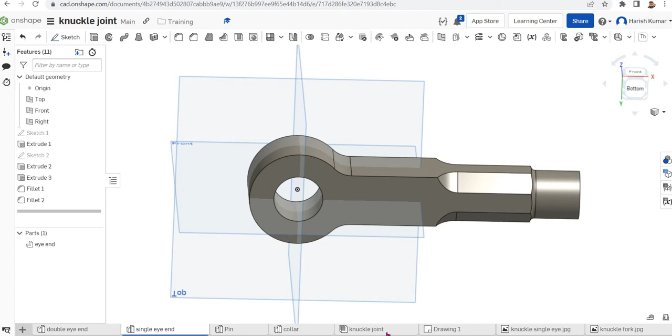Today we are going to do assembly of a simple thing which is a knuckle joint. It has only four components, and the assembled view will be like this. You can see this is a knuckle joint, already assembled here.

It has only four components: a fork end, a single eye end, then a pin. We will first start with the double end fork, then we'll do the single eye, and then the pin, which is quite easy. Pin and collar are quite easy.

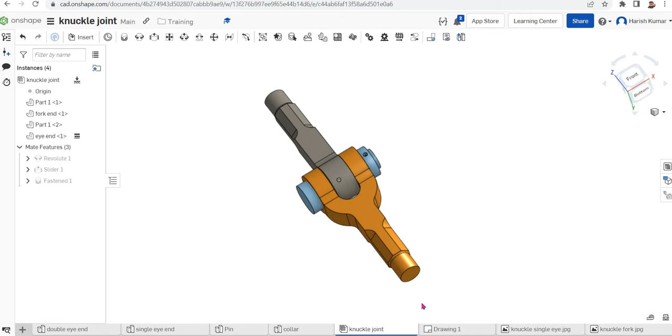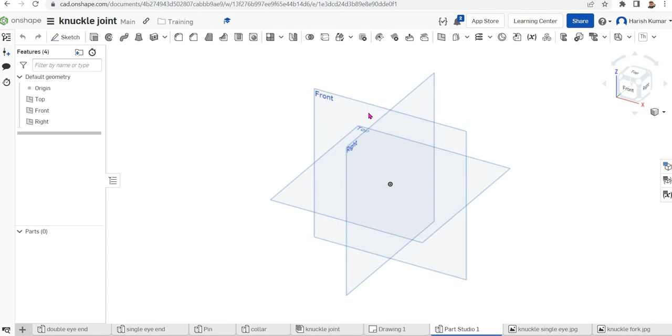Okay, so we'll start by clicking here. We'll start with a new part studio. I select front plane as the sketch plane, view normal. I will bring the single eye first.

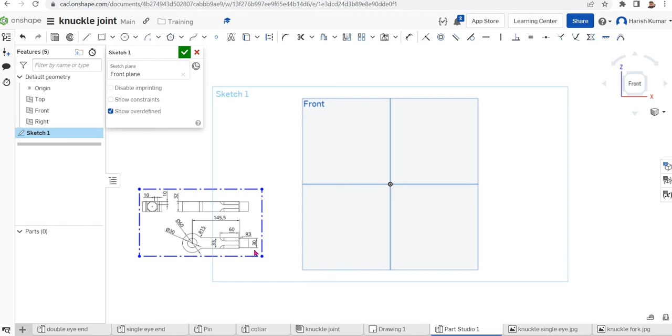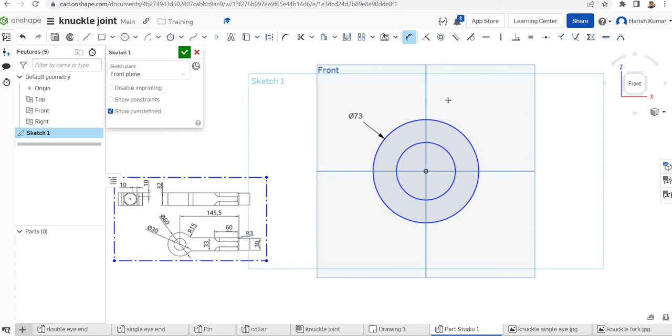So the dimensions we can see here. We will start with the sketching with the circle. Make dimensioning, that is 60. And this is 30.

So from this two-dimensional drawing we can see 60-30, and we'll just make a rectangle here, and the width of the rectangle is 33.

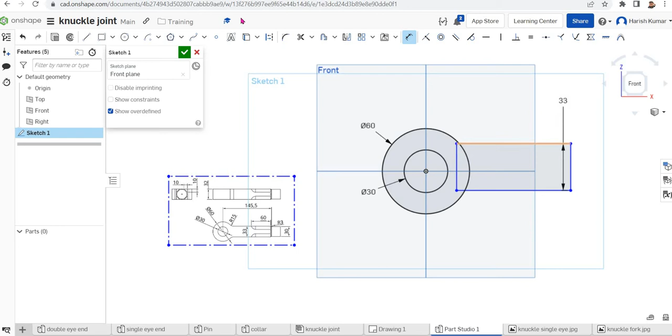I'll go for the symmetry constraint. Click the symmetry constraint, click this line, this axis line, this. It's symmetrically arranged. We have the length here as 145.5. So we'll make the dimension again. Click here, and make it 145.5. Right, okay, so our sketch is finished.

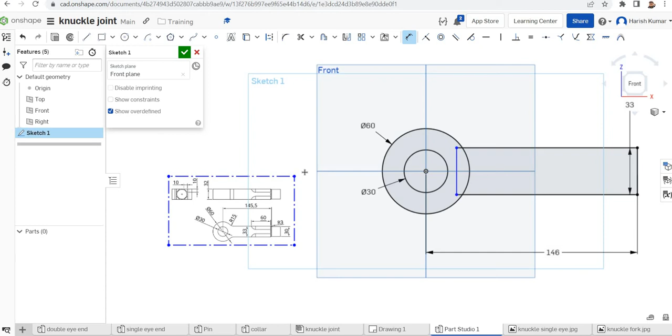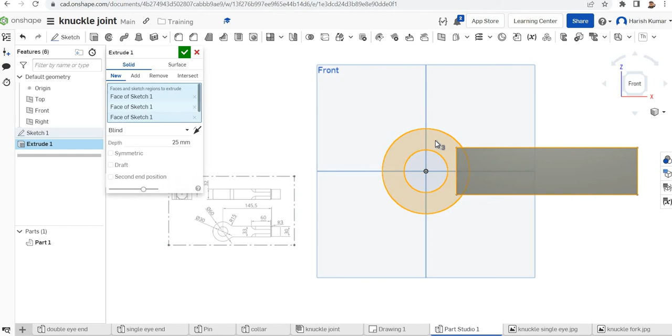We can directly go to the extrude. We can select this face, this face, this face. I just take symmetry, and the width is 32 here, 32. So the first portion is completed for the single eye.

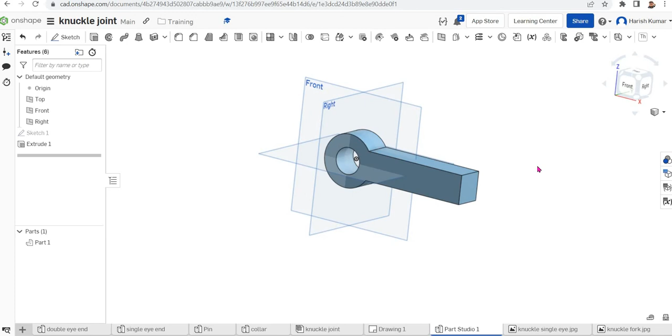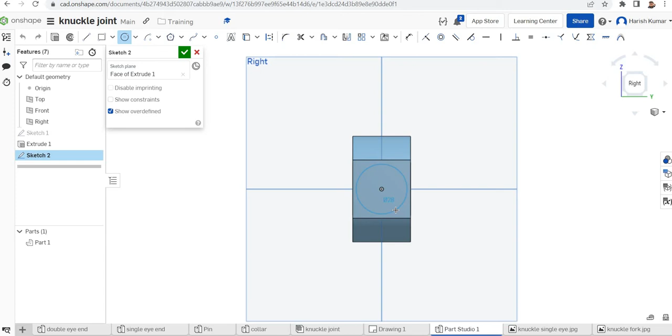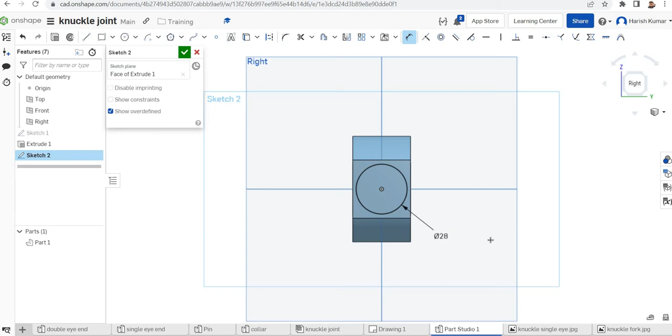Then we select this plane as a sketching plane, make it view normal. We'll draw a circle, and that is from the drawing it is 30. It is 30, and we'll make a line here.

Just make the dimension, point this corner as 10, point this corner again as 10. I'll make two construction lines for mirroring.

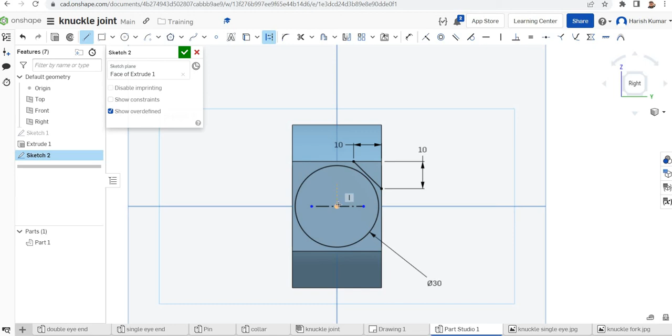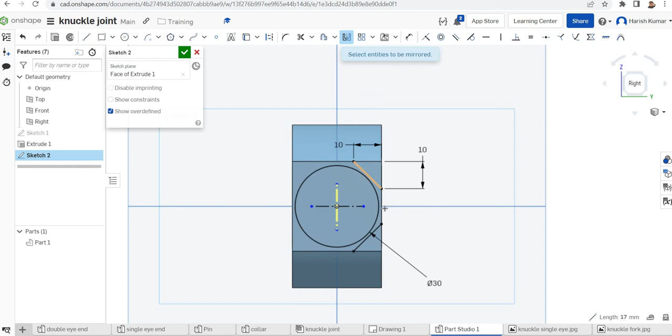Then I'll mirror this first, then again mirror about this axis, this one, this one. I'll go for an extrusion again, a cut extrusion.

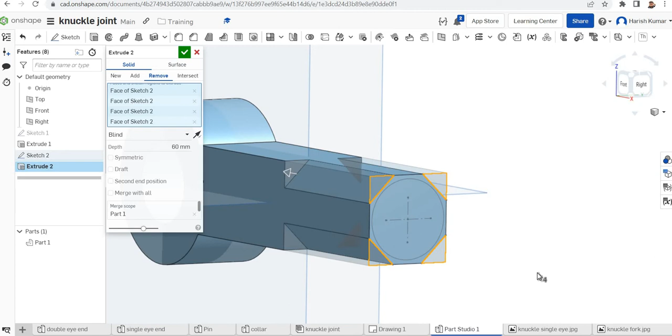This, and I make it remove, and dimension as per our drawing is 60. Finished.

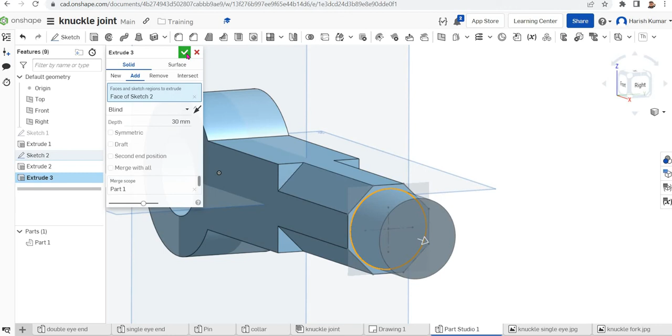Again I go for another extrusion of this circle only, and that is 30, towards the front side. Okay, just make this sketch invisible. Alright, so the basic shape we already get.

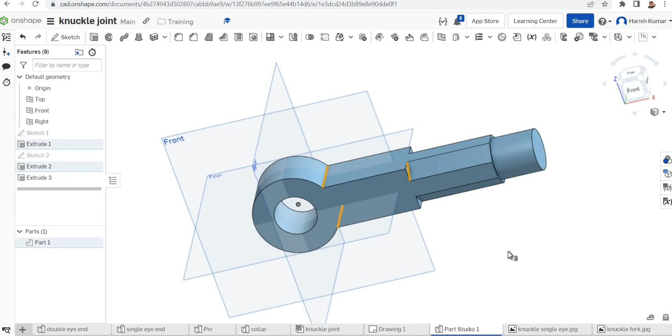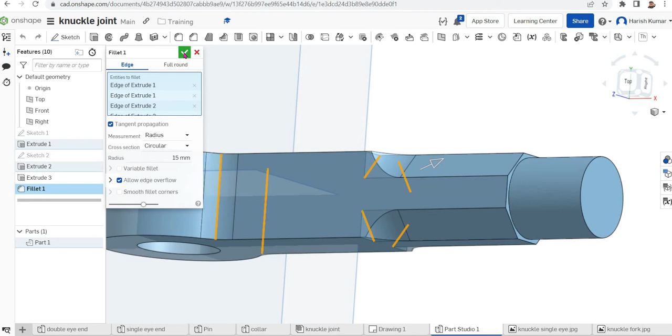Now we will go for the filleting. The filleting radius is actually 15. So I select this edge, this edge, this edge, this edge, this edge, and finally this edge. I'll go for the fillet and I'll make it 15. Okay, finished, so now we have finished.

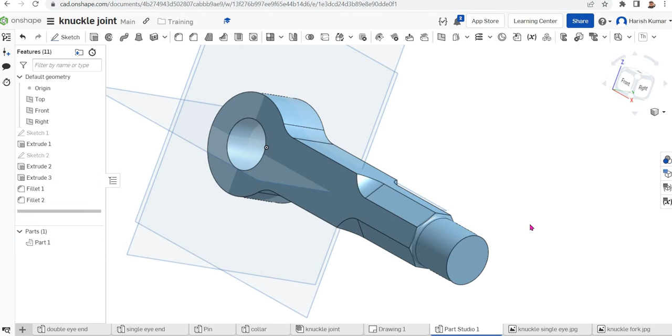One more fillet, we have to give this surface a fillet of 3mm. That's it. So we have finished the single eye end of the knuckle joint.

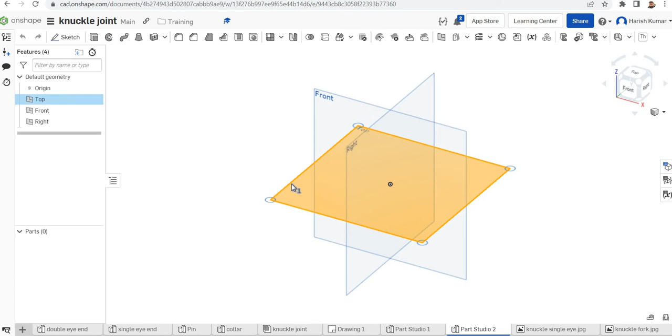Now we start with the double eye. For that, again we'll start a new Part Studio. We'll start with sketching in the top plane, view normal. I'll bring the picture first. Okay, so we'll start with a rectangle here.

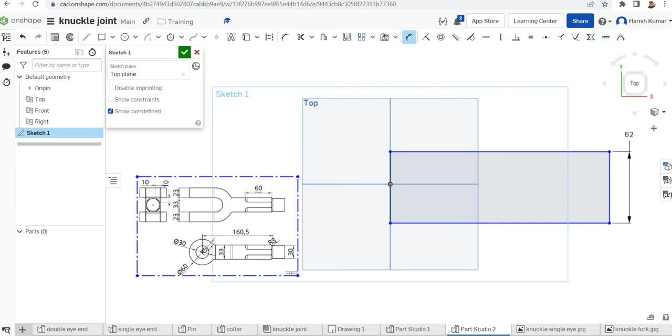The total length is 23 plus 33 plus 23, that is 79. Then I'll make it symmetry about this. That's the first thing done.

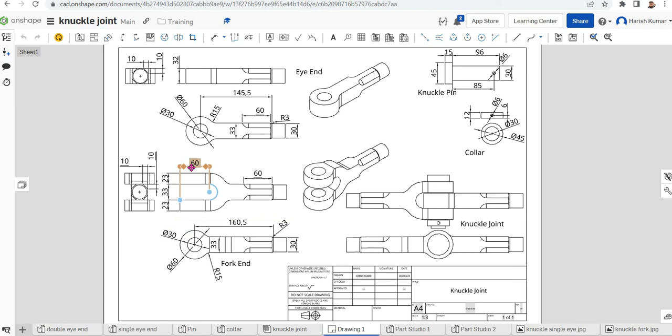Next is we will draw this rectangle. Okay, so what is the length of that rectangle? We will see, we will go to the sketch and you can see it is 60, so that's length is 60. It is not shown here, that's why I go there.

Okay, so we'll again start with the rectangle, and I'll make the dimension this as what, that is 33. I'll make symmetry for this rectangle about this axis, not symmetric, and I'll make the dimension for this as 60.

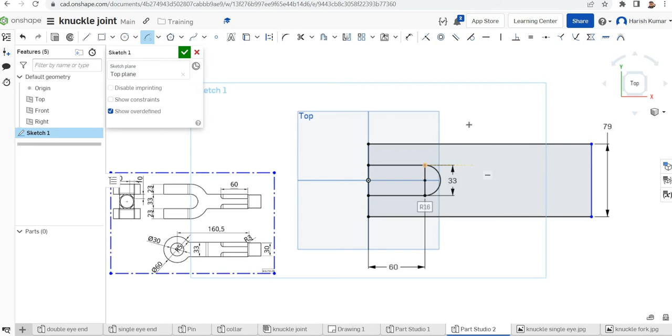Alright, now I move to arc with the center point arc. I'll just select this as the center, this as one point, and this as the other point. Again an arc, this as the center, this as the, this will be the next point. Okay, so you can see it's fully constrained. Alright, now again I go for a rectangle.

Which I draw somewhere here, and the width is again 33 as per the drawing. I'll make it symmetric about the axis. This and this are symmetric, and I'll make these points coincident with this. And we have this dimension 160.5, so we'll give that dimension from this center point and this line as 160.5.

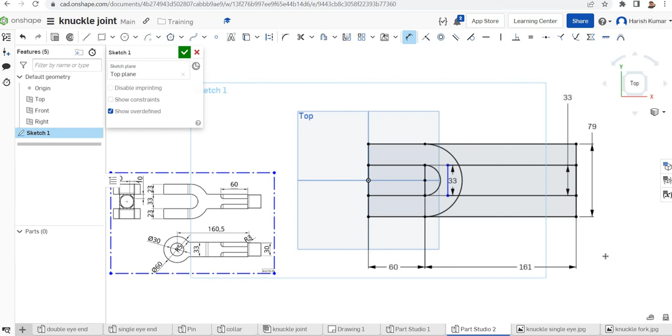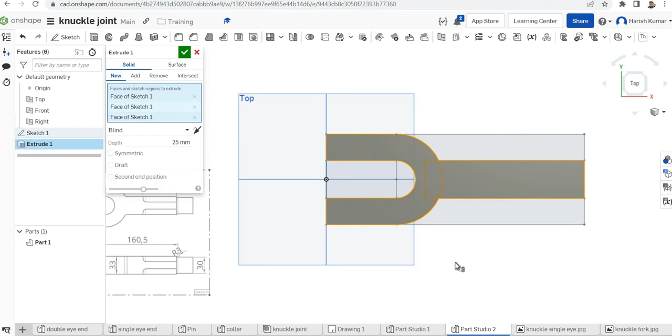Now we go for the extrusion. We'll remove this and select the profile which we wish to extrude. Click this area and this area. What is the length? That will be this radius, it will be extruded 25. All right, so it's finished.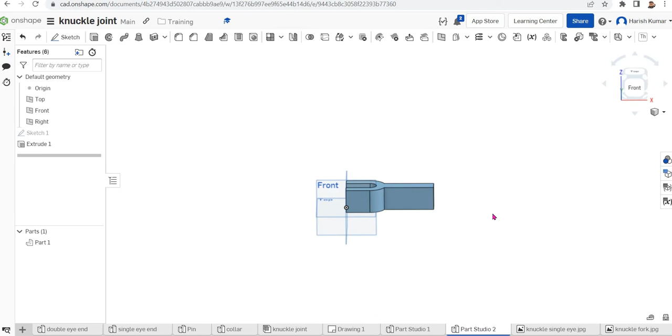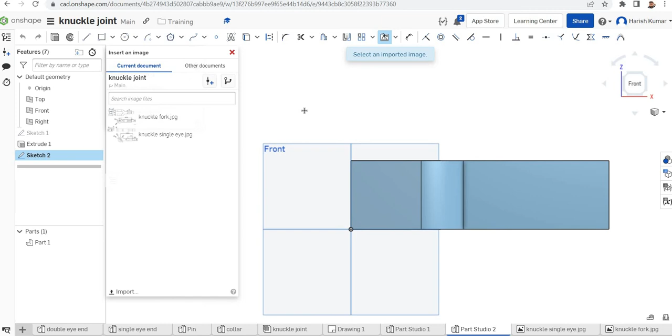Now we select this face for sketching. We'll bring up that picture again here. So first we'll project all these edges to this plane. For that you can use the project button in the sketch, click on that, and select this line, this line, this line, this line, this line. This one is already in the plane, no issue.

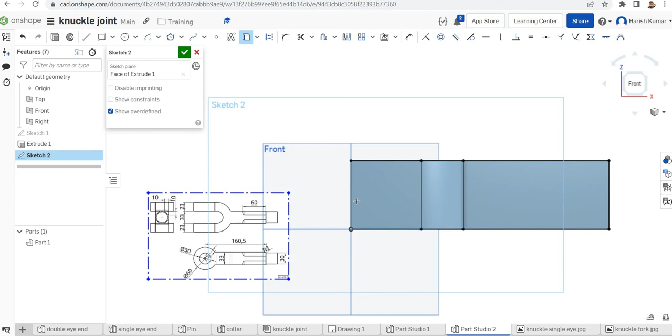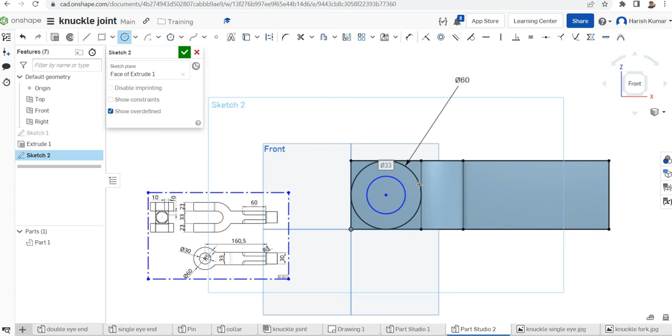So now we move to a circle. Just draw a circle and make it tangent, this circle with this, and this circle with this, and the diameter as 60. It is now fully constrained. Again we'll go for another circle concentric to this circle with a diameter 30.

That will be finished. Then we go for a rectangle, but we need symmetry, so we will make a construction line here, simply a construction line, and we will make this symmetric. Make this dimension as 33, so that dimension is 33 from here. So that's it, we have finished.

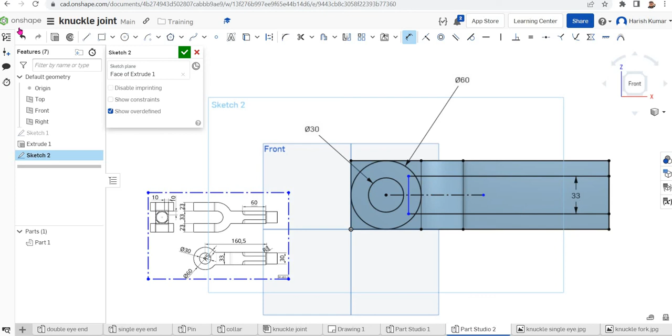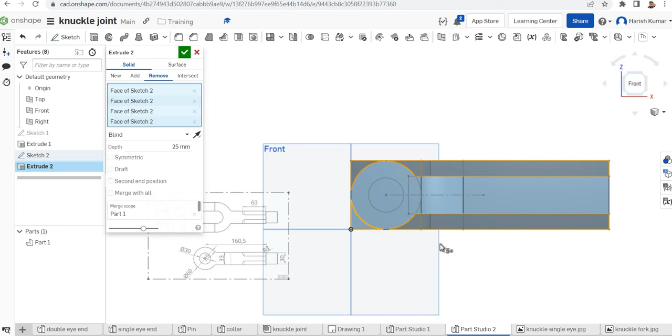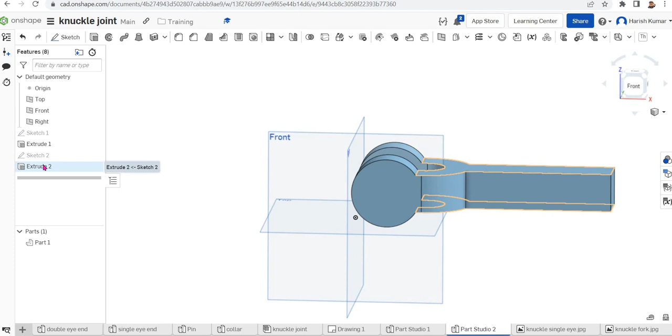Then we can directly go to the extrusion, but here we are removing surface. You can remove this, and you have to select the portions you wish to remove. This portion, this portion, this portion, this portion, this portion, and this portion. It should be through all. Finish. Now we forgot to select the middle circle also, so we want to select this also. Finish. So our basic structure is finished.

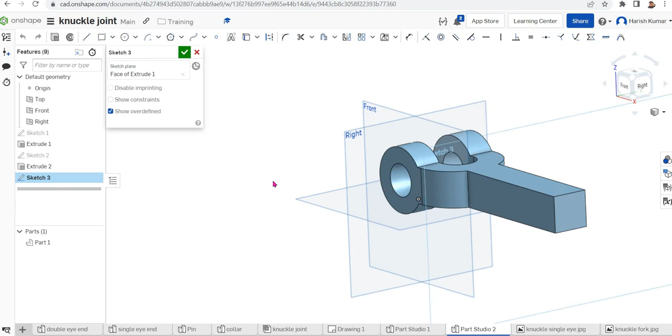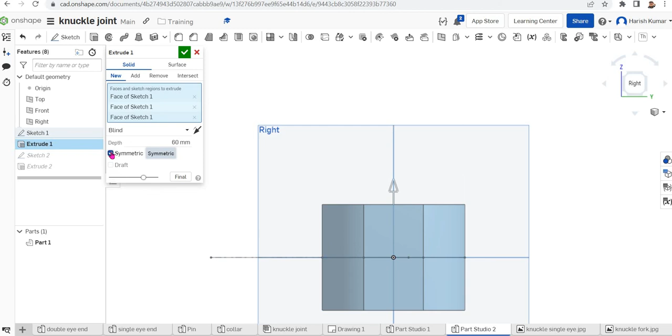Now we want to go for the chamfering and filleting area. For that first we will select this as the sketching plane, normal. If we get this at the center, that will be good, right? So for that we will go to the first extrusion where we did it blind. If we make it symmetric, that will be good.

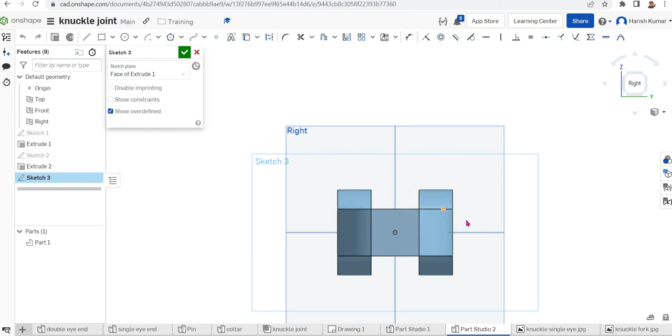We'll select this plane for sketch. So this is the advantage of parametric software, you can go to the history tab and make any changes that will be reflected at the remaining nodes in the tree. Click a circle, and that is nothing but 30 dia.

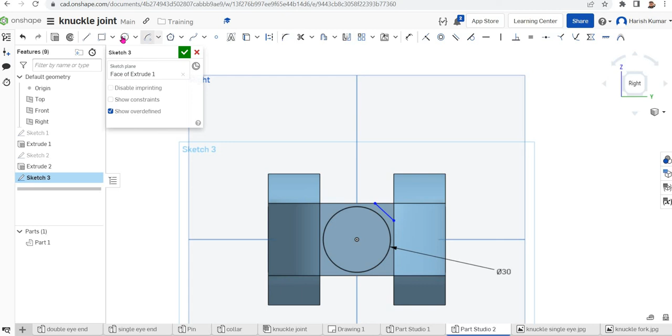Then just what we did there, we'll make lines here. This point, it is 10, as per the sketch. And this is also 10 as per sketch. Now we make two references for mirroring.

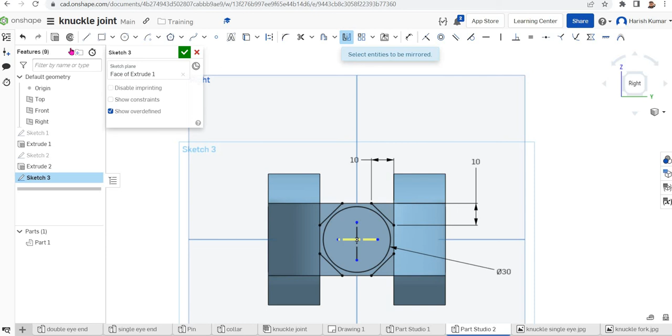We mirror about this axis, and again we mirror about this axis. So we have finished. Now we move to extrusion again.

Here cut remove is required. Click on that, remove this region, and we select the new region. This region, this region, this region, and this region. What is the depth? It is 60 as per the drawing. Finished.

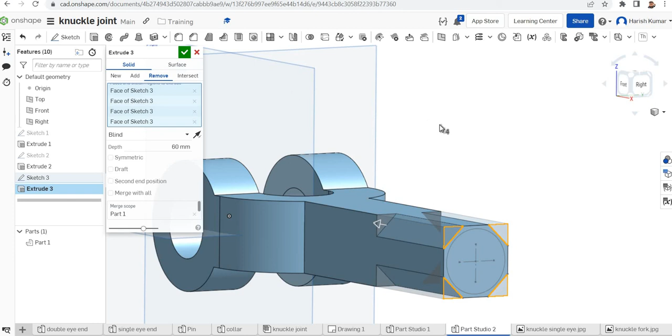Now we again make this sketch visible. We want to extrude this, right? Select that as 30 mm.

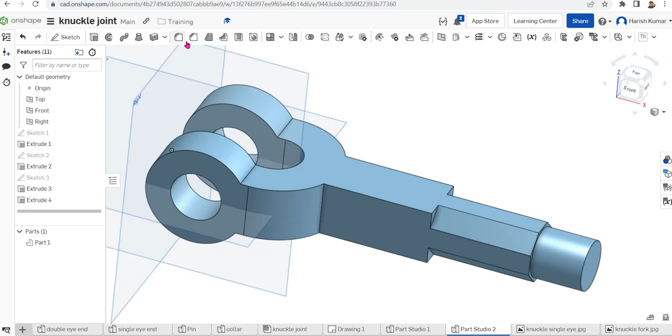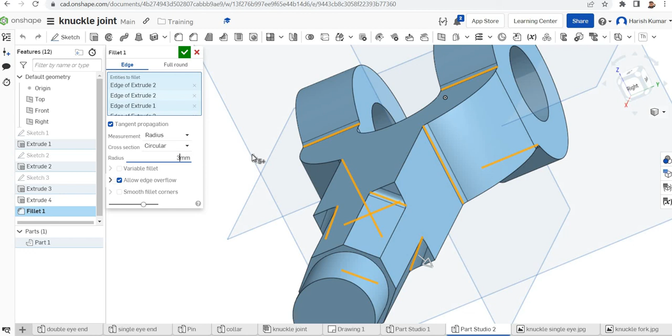Alright, now we move to the filleting. Select this edge, this edge, this edge, this edge, this edge, this edge, this edge, this edge, this edge, and fillet. Should be 5 as per drawing. So our fork portion is also finished.

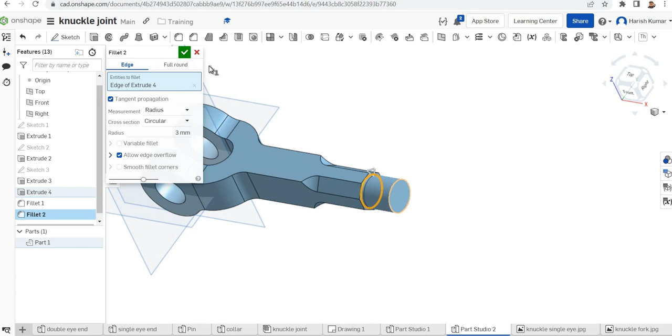We can give one more filleting at this end, that is 3 mm. So both the portions are finished.

We have finished the modeling. Now we move to the assembly part. The assembly portion will be put as a new video.